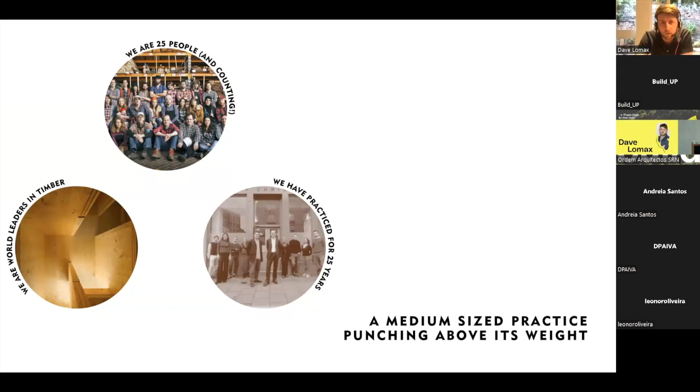And we think that we are world leaders in designing in timber. We think that we punch above our weight in terms of the size of our practice and our reach and what we do around the world. And first and foremost, we like to make sure people remember that we're not just wood people, we're architects. It's really important to us that the architecture comes first, that really, really high quality buildings are the things that

we aspire to do. But the way that we do that is to do that in the lowest carbon way that we possibly can. And in order to do that, we generate new knowledge. So about 20% of our practice's work is in primary research directed at sharing that knowledge and sending it around the world to help others to do the things that we as a small practice in East London can't do.

We do that internationally. We currently have live projects on each coast of the US, one in Italy, one in the Netherlands, even one in Portugal at the moment in a very early stage. But we also do the sharing of our knowledge and the research base and all those other things internationally as well from our base in East London.

So why do we do it? Why is wood important to our practice? Well, this graph here shows where all of the environmental greenhouse gases come from every year. This is a slightly out-of-date graph, I think maybe 2018 from the World Resources Institute. But if you look at the figures for iron, steel, and cement and add those together, you'll notice that those figures are pretty much the same as the energy in use from all residential buildings in the world, about 11%

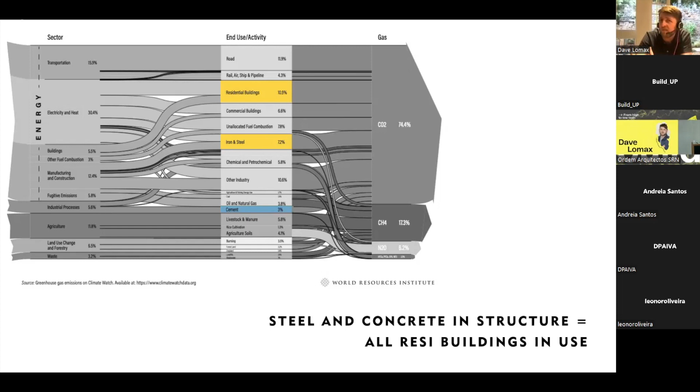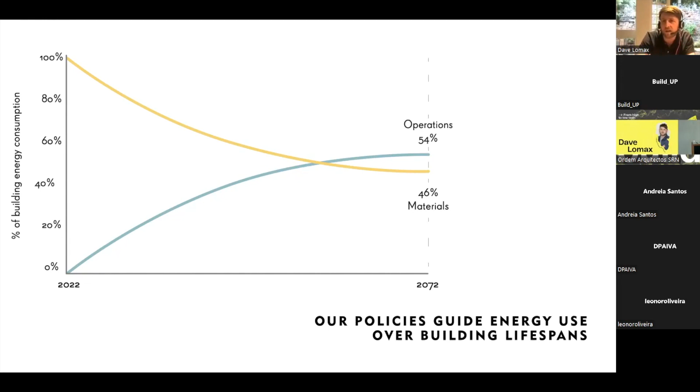And that's really important to us because when you think about the emissions from a building, on this graph, what you can see is that on day one, if we call it 2022, all of the emissions that have been caused by that building come from its construction, 100% in materials on day one. Now, after, say, 50 years, that balance shifts. Of course, we sleep in our buildings, we turn the lights on, we turn the TV on, we do all those sorts of things. Gradually, the proportion allocated to operation creeps up. And after 50 years, yes, most of the energy comes from operations.

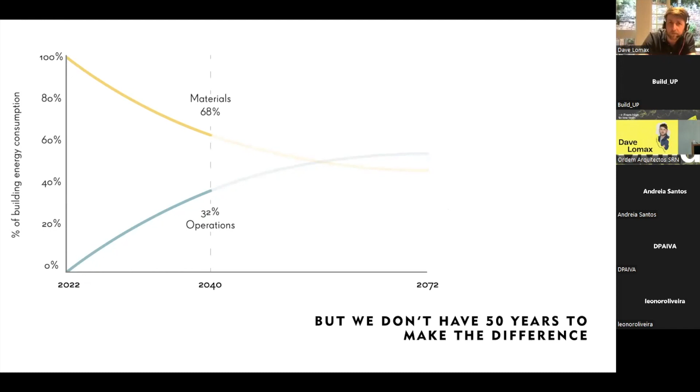But I think that none of us are talking about having 50 years to change the situation that we're in. We haven't made commitments for the next 50 years in terms of reducing our carbon output. We've made commitments on much, much shorter timescales. And if we take arbitrarily an 18-year lifespan, probably far too long in the first place anyway, in terms of reducing our use, at that point, we're still talking about 70% of the emissions from a new building built today being from the materials we use to build it. And currently, we're doing very, very little to change that.

Now, for us, we think it's really important that building professionals, architects, building procurers, people who buy buildings, building contractors, have a responsibility to own this, because the impact we can make on changing that metric, on changing that emission of carbon, is vastly bigger than an individual.

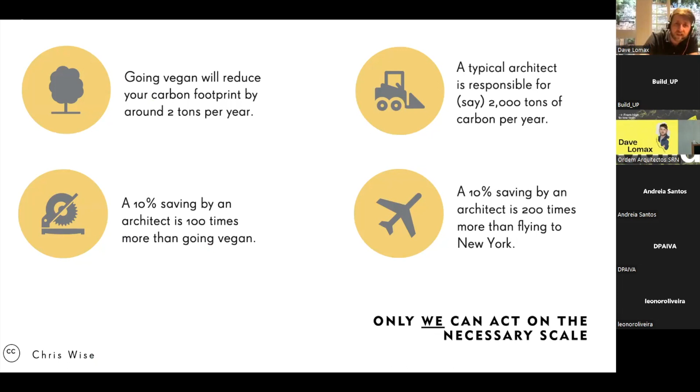An individual making a choice to no longer eat meat will make one kind of impact, but we can multiply that impact by 10 times, 100 times, even by making very, very small changes in the way that we practice. Not even necessarily on every single building that we design, but we have to try and we have to multiply our impact that way. And so for us, the crux of this is the opportunity that we have from timber.

So by using timber, we can take out iron, steel, and cement that you saw as being massive contributors to greenhouse gases and global warming, and we can replace them with a material that is much lower in embodied carbon. It takes much less carbon to produce. But more importantly than that, this is a material that takes carbon out of the atmosphere during its lifespan, and we have the opportunity then to put it into a building where that carbon can be locked away for 50, 60, even 100 years.

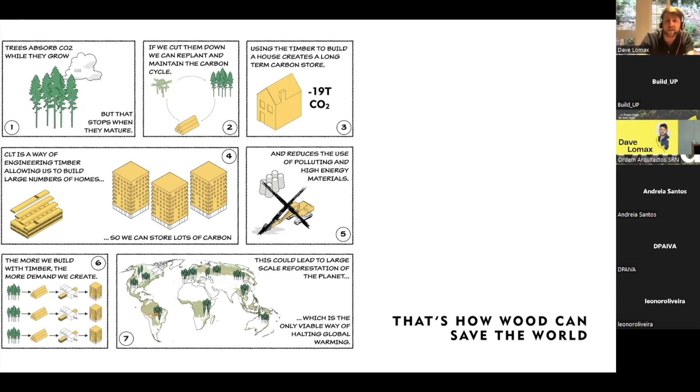Even better if you look at the context of the Canadian wildfires that we're seeing at the moment, where if we leave them in the trees, they're susceptible to going back into the atmosphere. But if we lock all of that carbon into our cities and create a massive carbon sink in those cities, we can store that carbon safely, manage it, grow more trees, take more carbon out. So to us, what's really interesting is the idea that this is the only technology that isn't only talking about slowing down our impact on the planet, but in fact hoping to try and do things that might slowly reverse it.

I said that there's very little policy about this. I mean, when I started giving this talk, there was almost none. But I think the other reason why wood is because actually quite a lot of the world has realized that this is the thing that we need to do.

Some of you will know lots and lots about mass timber already. You may well have just heard quite a lot. Sadly, my Portuguese isn't up to understanding what's been said already.

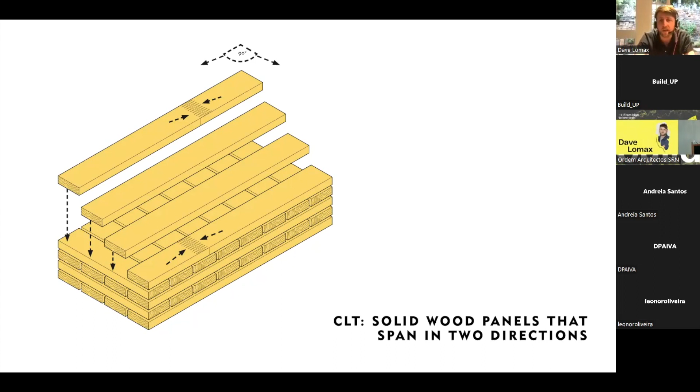But a quick guide is, many of you will have heard this acronym CLT. So cross-laminated timber. That is one kind of mass timber. I think what's important to say is that it's solid wood all the way through. That product consists of 3 to 7 layers of softwood normally bonded together, but the important part is that each layer is turned through 90 degrees in order to give spanning properties that work a little bit like a concrete slab with reinforcement. It spans in more than one axis. So it's enhanced in its performance from a single piece of wood that in its natural state only spans in one axis.

What's great about this material is that it's accurate. It's made in factories, it's made in safe environments, it's predictable, but also it does what it says it will do. So we know that the performance of a CLT panel is very, very likely to be incredibly close to what we predict it to be, unlike materials like concrete, for example, that are poured on site in the wind, in the rain, in varying conditions, and we never quite know what performance we're going to achieve.

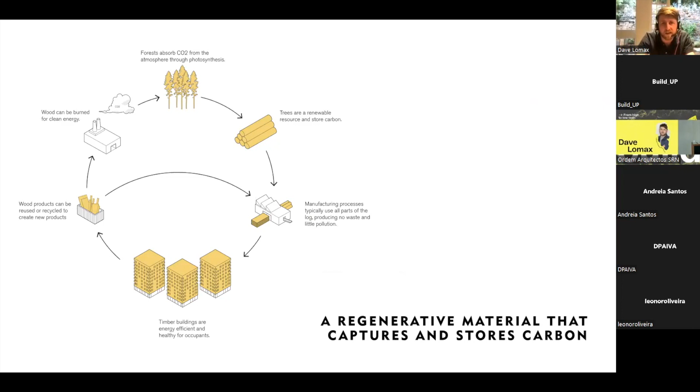Again, what we have is that opportunity to lock away carbon, but we also have that opportunity to create a cycle, to be really circular in the way that we use our materials and put that back into the atmosphere and back into the environment that we use to create it.

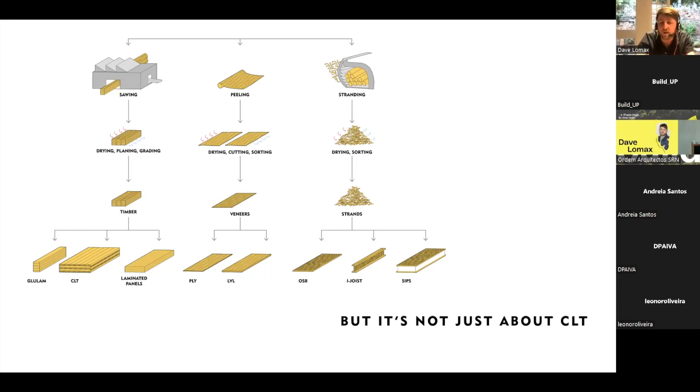What's really important is CLT is kind of the famous buzzword of the moment, the thing that everybody's excited in talking about. But actually for us, it's really not just about CLT. It's about really carefully understanding the whole ecosystem of these timber products that we can use to start to capture that carbon from the atmosphere and put it into our cities. And actually, there's real nuance in choosing these different materials, which we'll show you through some of the case studies that I'll put up on the screen in a moment.

But to us, what's become really important is the idea of thinking of mass timber not as an individual product that you substitute in for concrete and swap the gray stuff for the yellow stuff and everything will be fine. Actually, there's a lot more to understanding how to build in timber. And that has been a real focus of our research over the last few years.

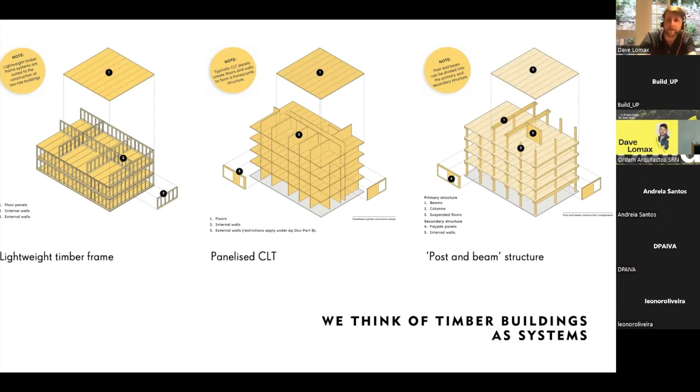And key to that is understanding the idea of timber and mass timber as a system, as a combination of elements that need to work in harmony together. We simply cannot design concrete and steel buildings and substitute out one material for another and expect to get really good outcomes in terms of carbon and indeed cost. So for us, the first step was to begin to try and construct some of these buildings, learn by doing.

And when we built Murray Grove, that was not our very first timber building, but certainly the largest. At the time, it was the world's largest. It was 9 stories tall. It was built incredibly quickly, incredibly quietly, in a clean and safe way. But at the time, no other building in the world in mass timber had been built at above 4 or maybe 5 stories. So to us, it's an incredible learning experience.

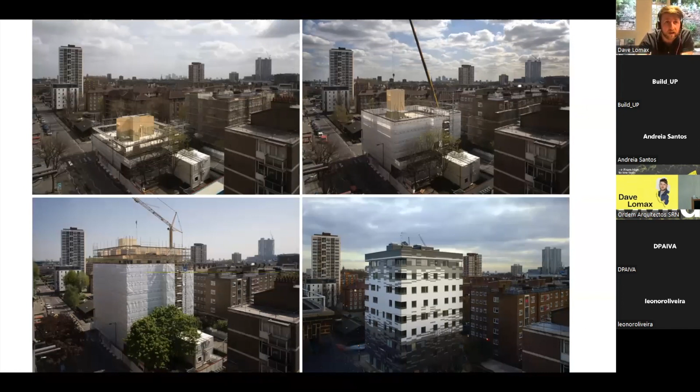It showed us what the barriers might be to constructing a mass timber building at this height, showed us how to try and overcome those. It showed us how to have conversations with clients to explain to them why they might choose to work in this way. But the most interesting learnings for us were around the idea of walking onto this site, smelling the wood, seeing how low technology actually it could be to assemble this with an incredibly small team of people, and being on what seemed a much cleaner, safer, nicer building site than all the ones we'd been on before.

And even the neighbors found the same, no cement trucks driving up and down the road, no jackhammers, electricians that could staple installations onto the ceiling rather than loading jackhammers onto their shoulders and hurting themselves by drilling holes to fix small screws into concrete soffits.

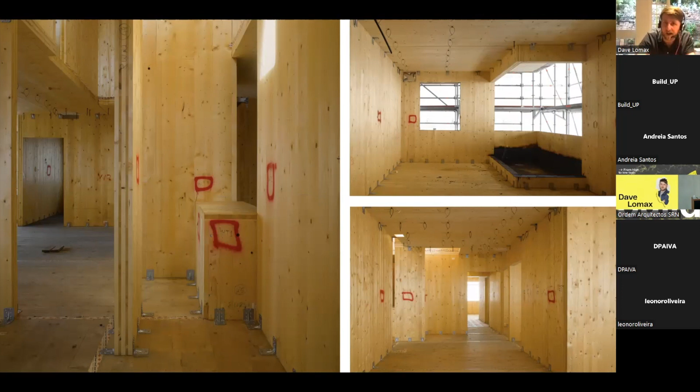It also taught us what the design parameters for mass timber buildings were. Here, of course, as you can see from this image, we're building in panels, so panelized CLT as a system entirely on its own. And so we had to learn what the logic of designing a panelized building was compared to the logic we'd always been brought up with, which was to design column and slab arrangement buildings.

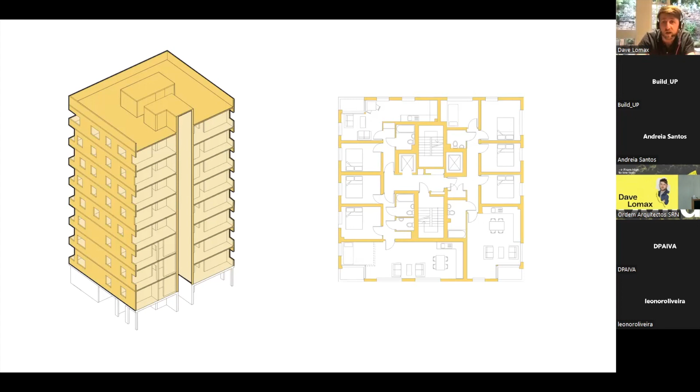Interestingly, because of the learning process we were on, we reckon there's about 25% more wood per square meter in this building than our modern mass timber buildings that we're building 15 years later. And that, I guess, shows the distance of the journey that we've had to go on over the years. But maybe an interesting example of how we jumped forward in that process is to show you Dalston Works.

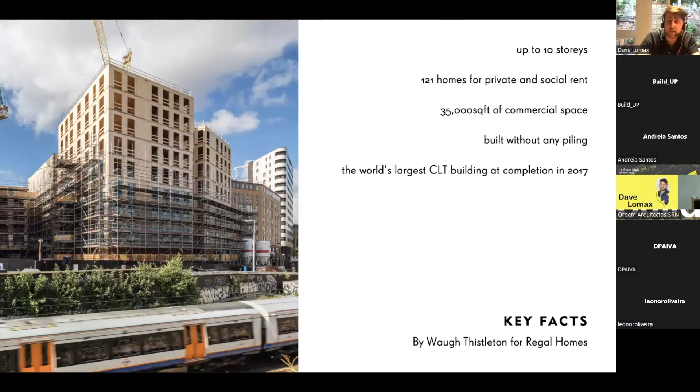So not actually much taller than Murray Grove, but I think for us, this was about proving the idea that we could do much more significant buildings. We could do them for developers that weren't in themselves especially interested in sustainability, but we could prove that this could be a normal way of building buildings.

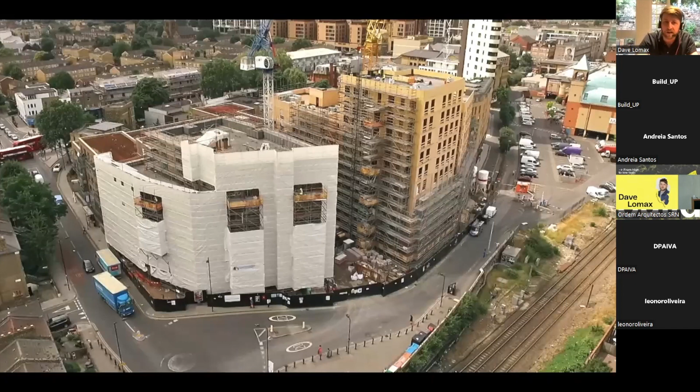Here you can get a sense of the difference in scale that we're talking about. So if I flick back, Murray Grove would have been this one core of the building. Here we have a building of 7 cores just 10 years later, built again, not for clients that are looking for a unique one-off building to prove how sustainable they are, but trying to make the difference with clients who maybe don't have this as their primary agenda, because that's where we can make the biggest difference.

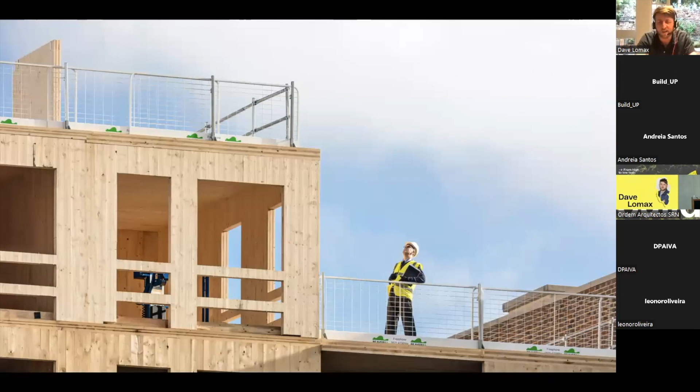But still, for this much bigger building, you can see the same simple connections, the same CLT panels, the same site managers wondering when the crane is going to land and drop the next panel into place. But here we started to learn how to have conversations with developers who aren't interested in sustainability and carbon, don't understand why they should do better when, of course, there were no rules around embodied carbon, as I said at the beginning. Now here we had train lines underneath. You can see the dotted lines that sort of constrain the site from building heavy buildings.

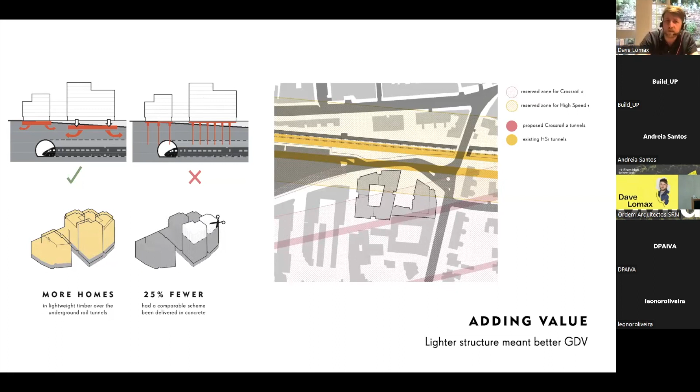We were able to talk to the contractor more about: we can build your building 20% faster, so if you've borrowed money, you can make more money. We can build 25% more homes because we can build the whole building on a 90 centimeter thick slab with no piles, which we couldn't do with a heavier concrete building. So we were learning to talk the language of our clients rather than the language of sustainability to ensure that these messages could get across.

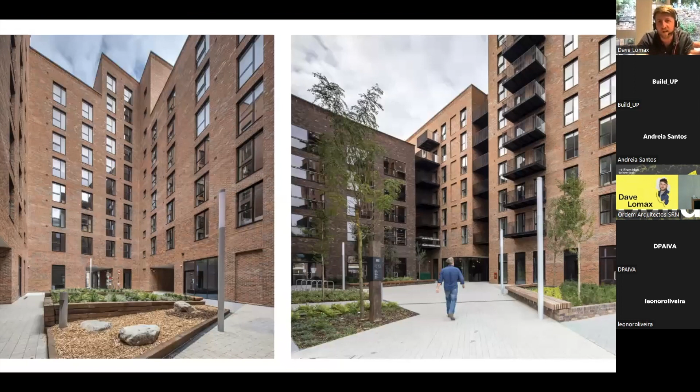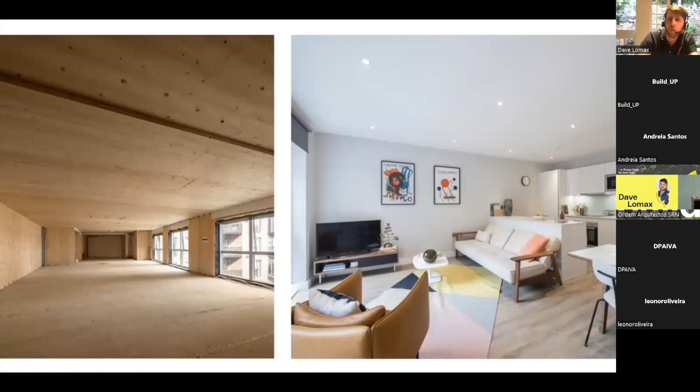And of course, for these sorts of clients, what's really important to them is that it looks just the same as all their other buildings. And so that's what we proved. A building clad in brick, maybe not the brightest idea to put heavy materials on lightweight buildings, but we were able to prove to them, hey, you can have more money, quicker building, less borrowing, and ultimately the same product that you sell every day. So why wouldn't you do this? Why wouldn't you save carbon and build in this way?

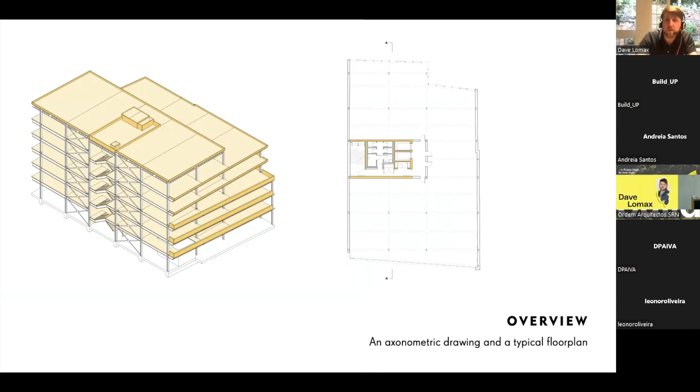Now, part of that journey was learning to build in other materials and learning to build in other sectors. 6 Orsman Road was our first really significant office building. This allowed us to investigate lots of other themes: the idea of passive shading of the building, bigger ideas of how buildings can be sustainable, using lightweight cladding materials to show that we can have a back-to-back process with factory-made cladding to go onto factory-made structure, and also looking at hybridizing the building in certain situations, using a combination of steel and timber to do as much as we can in every individual building. If we can't build the whole structure out of wood, maybe we can use some wood, reduce the embodied carbon, but compromise in certain places.

And this building also was the start of our journey in thinking about demountability. So every single connection here is a bolted or a screwed connection. There are no welded connections. We know that we can take this building apart if a component fails, if we need to change its performance, and we can keep that carbon in the CLT for much longer if we know that later we can take it apart and use it in another place, or repair it, replace it, extend the life of the building.

Now, as we started to deliver and build real buildings, it was important to us to work out how we can collaborate, share, put that knowledge wider into the world. The first document that did this was the CLT 100 UK book. We actually produced this as a study for the Binational Softwood Lumber Council, which is a collaboration between US and Canadian State Departments. And this was a study of 100 projects that already existed in mass timber in the UK, aiming to show to people that this is not brand new. There is data, there is learning from all these projects.

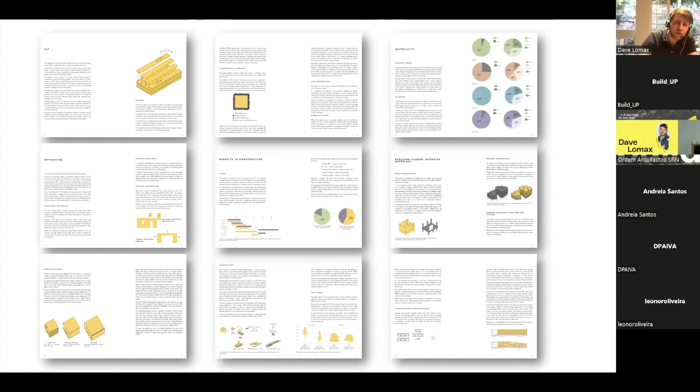And this was used by the Binational Softwood Lumber Council to start to lobby for and talk about the idea of building code change in the US. And I'm happy to say that in a few states, they now have been able to secure that. But this was the first attempt at gathering together what we know and sharing that as a how-to guide and as an evidence base. Moving on from that, we've been doing work in the UK housing sector.

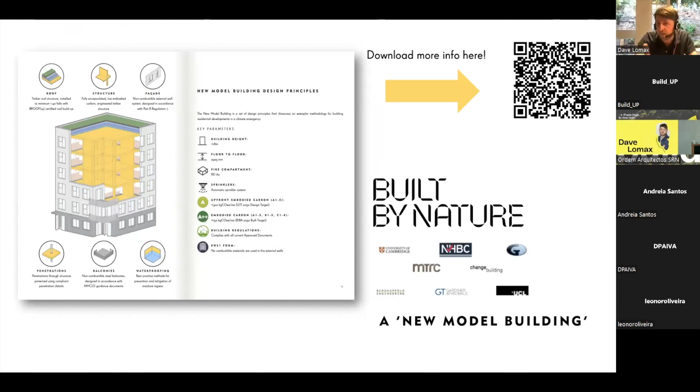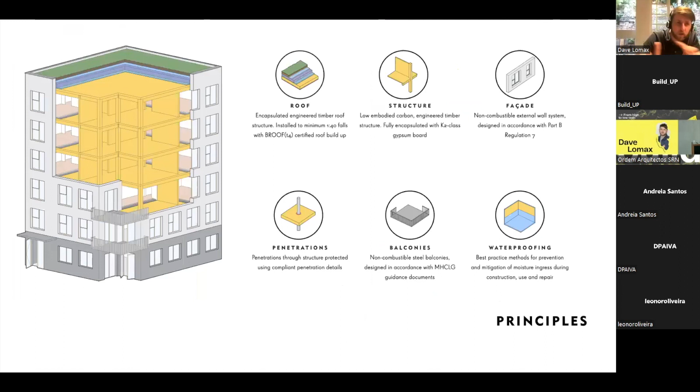You may know that there have been some challenges in delivering housing following on from the Grenfell fire in the UK. What we wanted to do was prove to people that none of those changes meant that you cannot build residential buildings in timber. So we gathered some funding, we gathered some partners, a really exciting team of people, to put together a document that proves that you can build this. It consists of a series of individual principles, a performance specification, details, and here you can see us starting to investigate that idea that even though each building could individually be different geometries, different shapes, we start to talk about delivering mass timber as a system.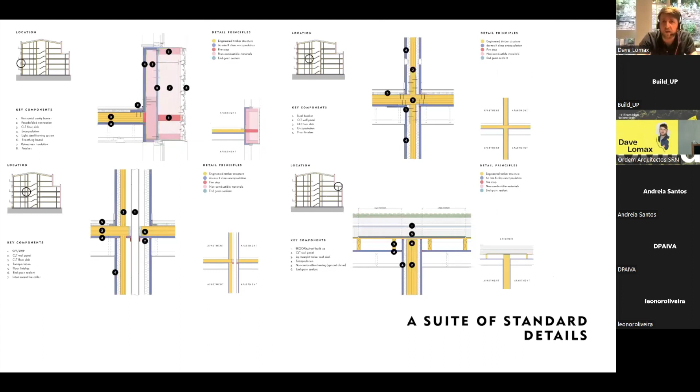If you apply the principles of this specification, if you apply them in the way that we have developed these color-coded, performance-based details, and if you build them in the sequence that makes sense and is approved by other parties, you can deliver in mass timber without taking on this personal risk and liability of learning each time as a bespoke product how to deliver within the building codes that you're working with.

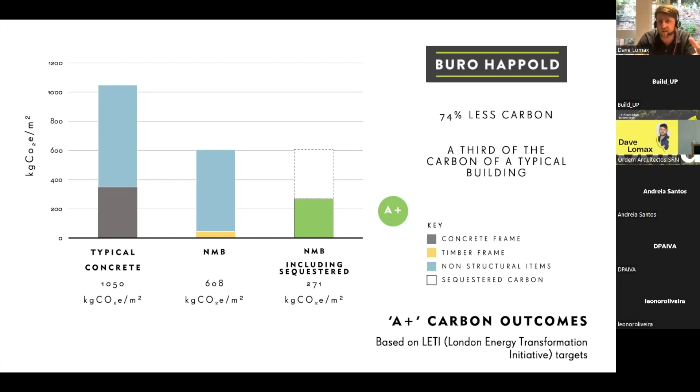What we're also able to do in the new model building process was to quantify what the benefits of that are. So here you can see that if we compare a typical building we designed using these details with a concrete building of the same scale and the same arrangement, we're looking at 74% potential reduction in the embodied carbon of that building. So if you go back to my earlier graph of saying, on day one, 100% of our carbon emissions are from embodied carbon, well, now we can reduce that by 74% for a timber residential building between 3 and 6 stories in the UK using this systematized approach to building.

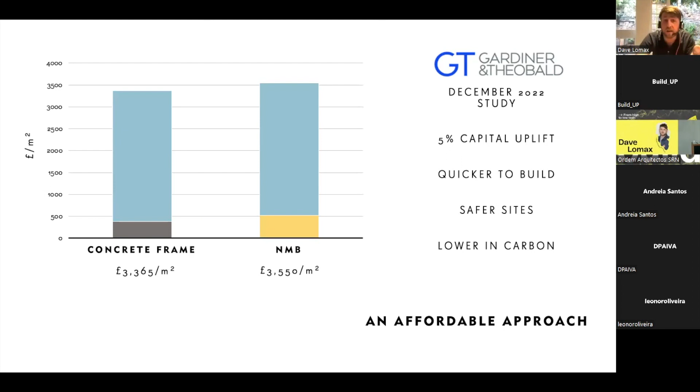And of course, from all our learnings of building buildings before, we know that clients who don't have to do this want to know what's in it for them. So we're able to quantify that in terms of costs. It's a 5% capital uplift. We're thinking that there are going to be carbon taxes of maybe 120 euros per ton in the next few years. The moment you compare that 74% reduction in carbon with that 5% difference in capital cost, you can see that as soon as people start to look ahead to all those policies emerging across the world, when those policies start to turn into money, that 5% is going to be a saving, not an extra cost. So we're able, through research, publication and collaboration, to start to prove the logic of the things that we knew intuitively and demonstrate the things that we've studied through doing.

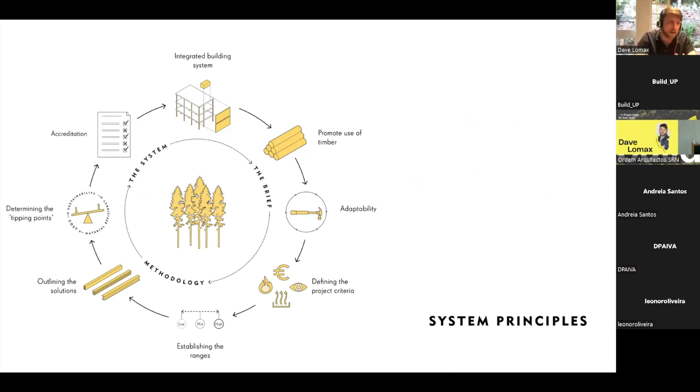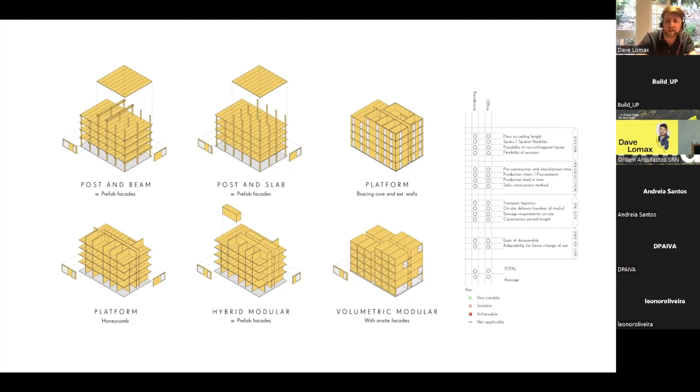Finally, in our research bit, we're also able to share that across the EU. We're just coming toward the end of a 4-year funded research program with the European Commission, part of the Horizon 2020 fund. The idea is to take those ideas of systematization, expand them across a massive set of available mass timber systems, LVLs, glulams, CLT, and apply that same idea of layers of information and categorization of components into a system, so that we can create a how-to guide, expressed as a free website, which explains to anybody in any territory in the EU how you will meet your local building codes under the headings of vibration, fire, acoustics, whatever it may be, by applying other layers in a systematized way, because we have that evidence.

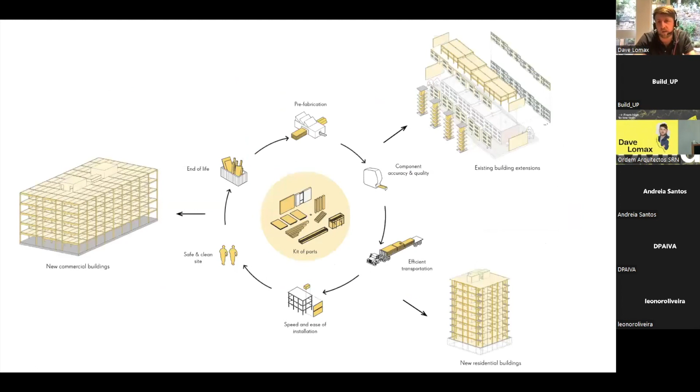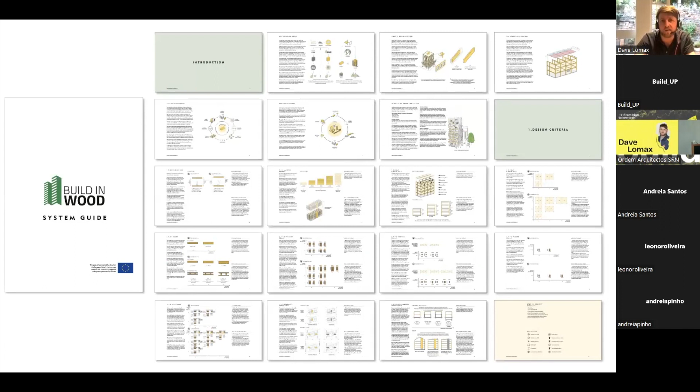We're currently building a demonstrator building, a prototype building with the Danish Technical Institute in Copenhagen, and that will come along with new test data that proves the way that we're doing things. And it overlays other things we're excited about. Even in this process, we've identified new demountable timber-to-timber connections developed by Rothoblaas based on the outcomes from this research. And that will be published as a very big book. So I'd encourage you, when the time comes, to look at the website and Configurator as an easier way in. But really, this is about us multiplying our reach as a small practice with a particular passion, to share that with the rest of the world, to make the size of impact that we need.

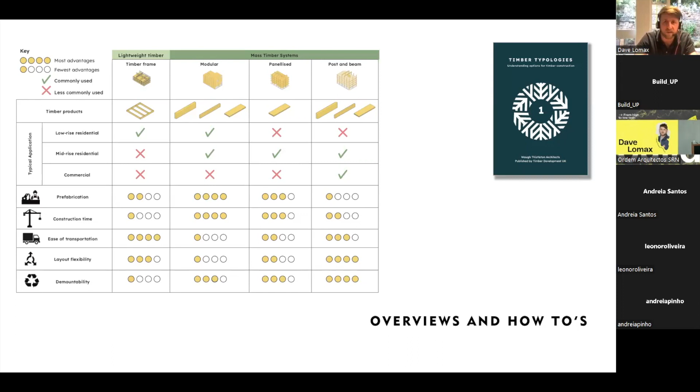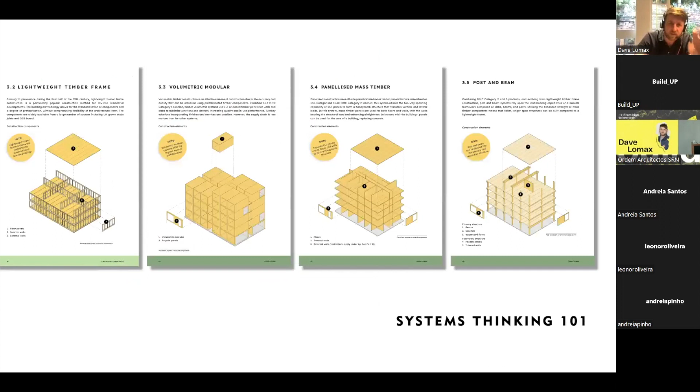Maybe this should be the first document, but it's our most recent, so it comes at the end. This is wheeling right back to the beginning of the conversation, a document you can download right now, volume 1, which tells you from very first principles what we mean when we talk about mass timber. It's a great document for sharing with teams in your office who might never have come across this before, talking about the individual components, the different ways we can make components out of timber, what that means in terms of systematization, and giving you rules of thumb. How big can it be? How far does it span?

Why would I choose glulam versus panels versus timber frame? Now, having done that, we've been on this big loop of learning by doing. We've tried to codify that, share that, enhance that with testing and primary research and data that we can learn from partners from across Europe and indeed across the world. The next thing is to start to go back and apply that back into our work.

So on a very small scale, we were able to look at those ideas of volumetric and modular design, ideas of demountability, with this pavilion that we provided for the American Hardwood Export Council. We were also able to investigate new species here. So this is tulip wood, which is in oversupply in the US, and AHEC, the American Hardwood Export Council, they commission a pavilion in this every couple of years to promote that material for use over here in Europe, so it stops being used for fuel and going back into the atmosphere.

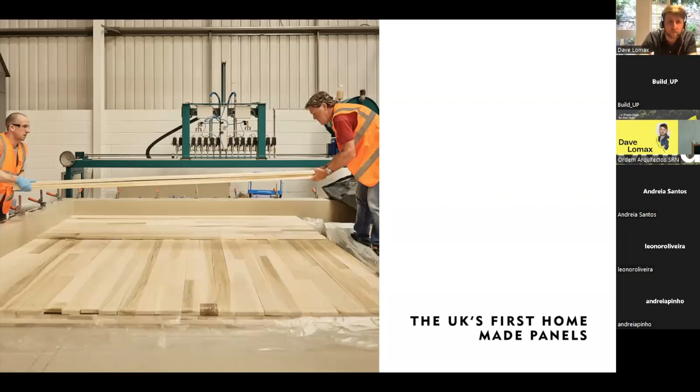And we said, well, hold on, why are you making a pavilion every year and then throwing it in the chipper? That's the opposite of what you're trying to achieve here. We said, why can't we make this at home in the UK, the first ever CLT panels pressed here, albeit with American lumber. And then let's make it into something that we can take apart again and reconfigure and show to other people. So what we did was exactly that.

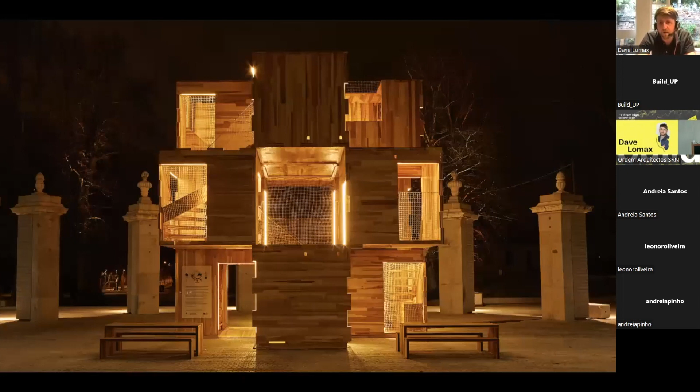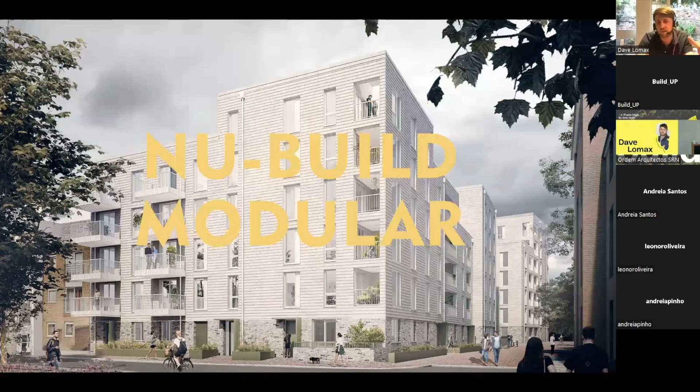So again, we're testing these ideas that we've had in research and in buildings, prototyping them on a small scale, then implementing them in bigger scales. So we were able to start to think about how these demountable, modular and reconfigurable designs might work for housing. So here, this was a project where we used our newfound skills in codifying and sharing to design a system that underpinned a whole new factory built by a housing provider in the UK.

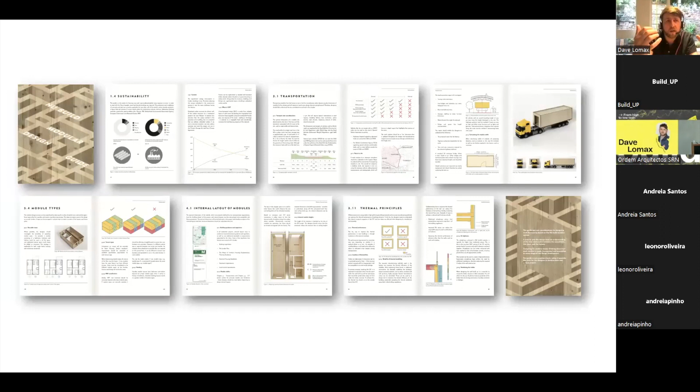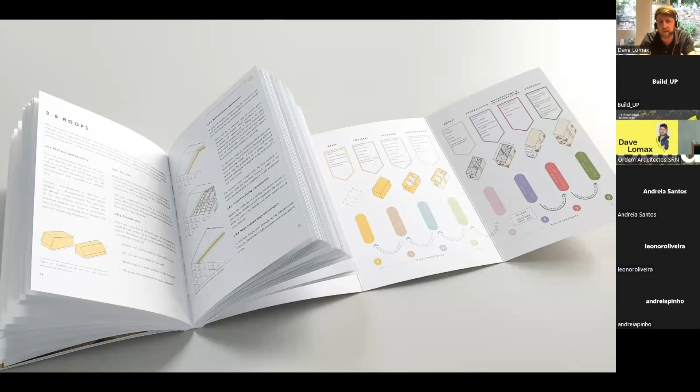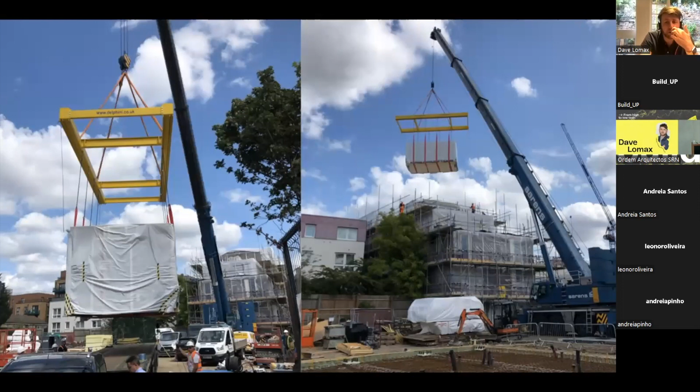They wanted us to work through and understand by doing what their system ought to be, and then codify it, turn it into documents and share it so that other architects could work with their factory to design their next building. And of course, none of that's any good unless you actually do it. So here are the first modules being constructed in the factory. Here they are leaving for site, and here they are being erected into the building that you saw at the beginning of this little section of slides.

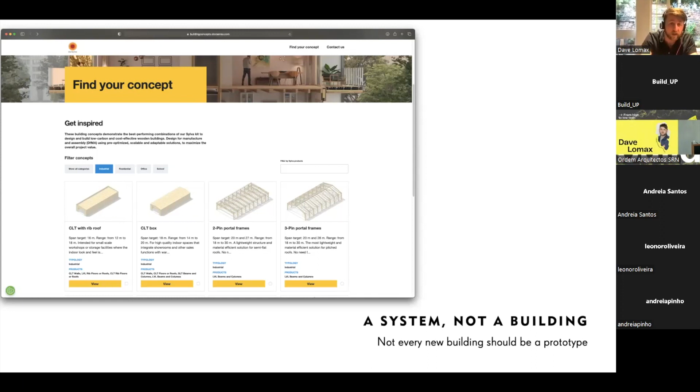We're expanding that into other sectors. We're taking that same systemization approach and idea into industrial buildings. This is a system you can buy today from Stora Enso's website. They very kindly invited us to help them codify the different decisions you might make when procuring industrial buildings. It's another sector where we can and should be reducing our carbon impact and using timber. The whole thing is there like a configurator.

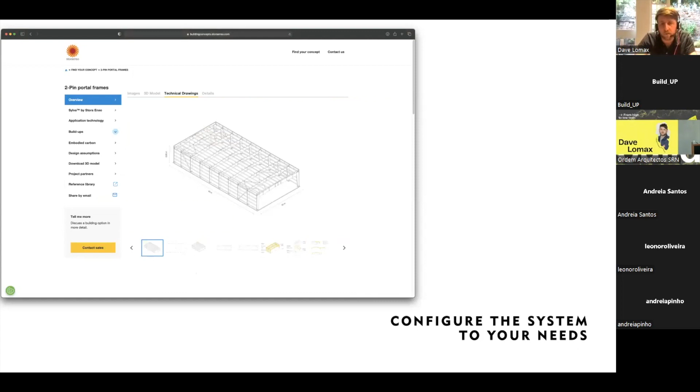So if you were to buy a car tomorrow and go online and you wanted to know how much it cost you for that leather seat or for that air conditioning or for a CD player, if you've still got a pile of CDs lying around somewhere, I don't know. This is exactly the same process. So you go online, you choose the parameters for your project, the size, you can download details, you can download 3D models. That will give you a volume of timber, which can quickly get you a cost from Stora, and you're able to go and buy it today and go and build it.

That principle is based on this idea of pixelization, I guess. So what is the right resolution of standardization? We think that standardization shouldn't be whole buildings. You shouldn't go and buy a whole building off the shelf. You should have choices, but we need to know at what level we standardize.

So if we take examples from the car industry, it's not about using robots. It's not about using pulse line manufacture. It's about understanding what should be standard and what should not, because car factories don't make things. They buy things and they assemble them. And a really great example here is the Mitsubishi platform, which is wheels, chassis, engine.

That Mitsubishi platform creates vehicles that are as different as the Lancer, a kind of sports vehicle, versus the Jeep Patriot, a completely different vehicle. They have the same component at the middle. So it's about working out what scale should we be componentizing, what scale should we be standardizing, and actually from a standardized system, you can get all of these different variations. And we've learned that through really understanding the different materials, processes, products that are available in the timber industry, understanding the supply chain, and understanding how they all work together as a systematized approach.

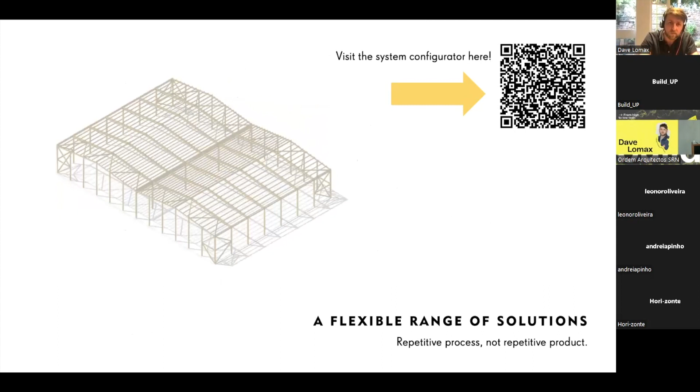And of course, they don't have to be ugly. So a few images here to explain exactly what the environment might be like in some of these buildings and what they might be used for.

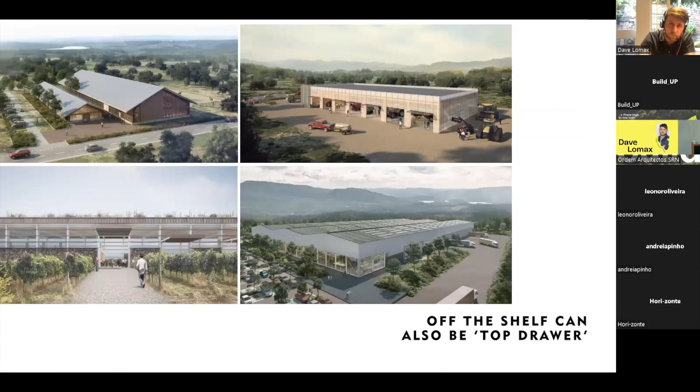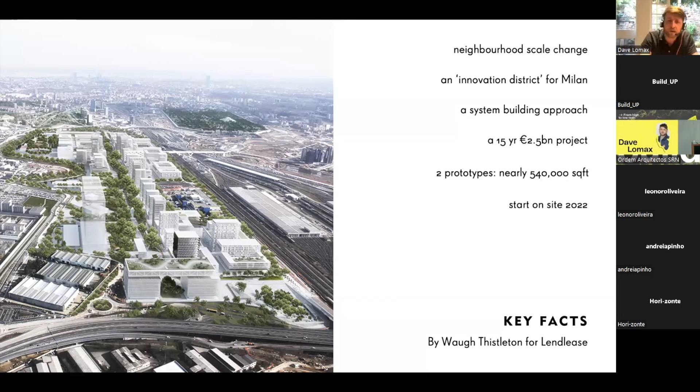So at a different scale, we applied this to a project for Lendlease in the north of Milan at the old Expo site. The principle here was that Lendlease said, well, we like this idea of systems, but we're going to have to build hospitals, schools, offices, homes. How can we develop a €2.5 billion master plan over 15 years using a systematized approach? And we said, well, what we need to do, again, is work out what's the right size of thing to standardize. And what we established for them was that a working prototype would be this 9 by 9 meter grid, which we knew could give the flexibility to deliver all the things they wanted.

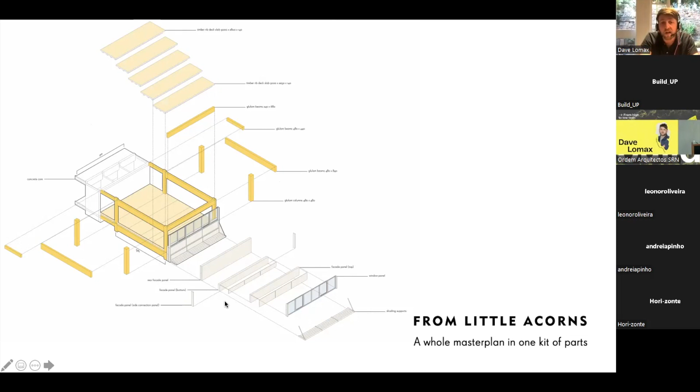Each of these components could be called off from the factory exactly the same every time and have the flexibility to deliver the things they want. And it could be backed up, just like a car factory buys steering wheels from different places, buys leather seats from different places to assemble them into one. It could be backed up by a kind of hinterland of other products that can be standardized to meet it.

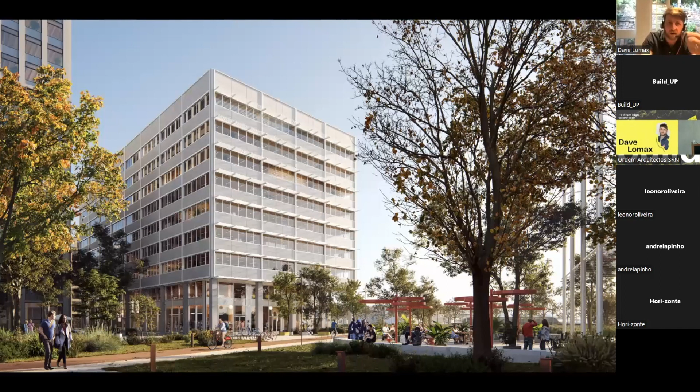And if we multiply that by a number of floors and layer that up with different products, you can see how we can create buildings and how that can be multiplied into whole campuses of different proposals, each entirely suited to its own function, but based on that standard 9x9 grid that is the beginning of it all. And of course, again, to our mind, we think we're able to create beautiful buildings, great spaces that are environmentally responsive and do all the things that they need to do. But all of it from this first prototype, which is available to go and see right now at the Perceptions of Timber exhibition in Milan.

So this is the squishy bit of the presentation. I've gone pretty quickly. We're at 22. I'll try and get through this section quite quickly because it'd be great to have questions from you. But maybe I'll flick very quickly through the last couple if we're running out of time slightly.

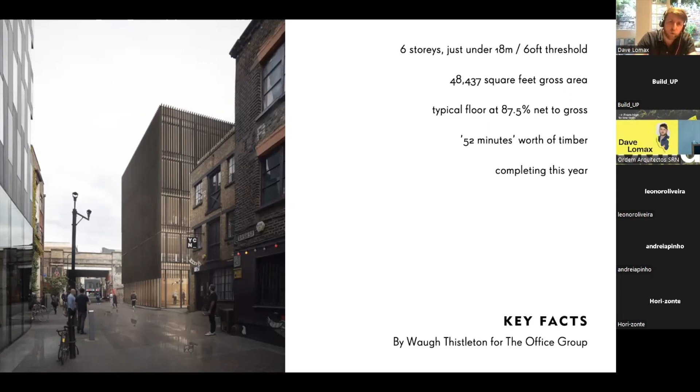This is about the buildings that we are recently completing, that we're working on into the future, that maybe test even more exciting to us, at least, and novel ideas. The black and white building is one that we completed earlier this year in London. It's been very popular. We've shown over 600 visits around this building during the course of its construction and after its completion. And it's interesting to us because it's a building where the client was really engaged in designing the building with us and also really wanted to tell the story of sustainability. So unlike a lot of the buildings we've built, there is lots and lots of exposed timber. It's really easy to tell the story.

And we can start to build real evidence for these ideas that we've been having and tell them through data, tell them through experience. So for example, we have a building here where the basement, a single story of accommodation, took 38 weeks to build, but 6 floors of accommodation above that took only 14 weeks. That was erected with between 4 and 6 people on site at any one time, a tiny number of people. The neighbors were worried about noise. Their noise monitor went off once during the 18 months of construction. The reason it went off was because they had their own party. This is quiet, quick, neighborly construction. This is also a building that really leverages 15 years of knowledge in different structural systems.

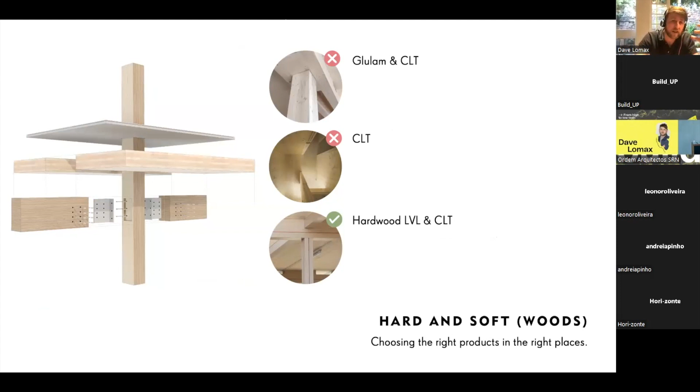We were able to identify the use of LVL, which is a very under-recognized, very rarely used material in the mass timber space, which gave us an amazing economy of material and allowed us to get the big open spans that we needed, but with the absolute minimum of material and therefore the minimum of cost. But also we started to think about the architecture in the way of what is this architecture of sufficiency? What's the minimum we can use?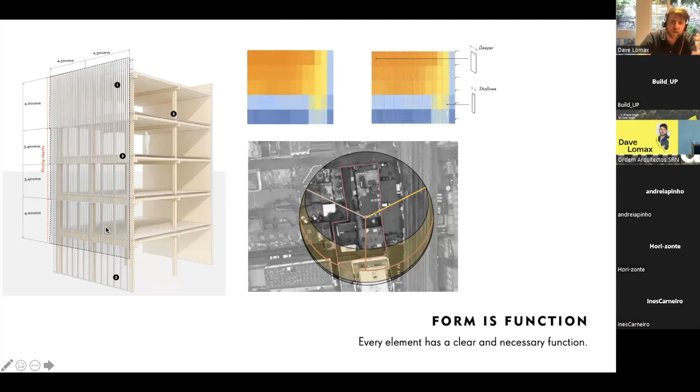So we started to use the computer and parametric tools that we started to learn through standardization and factory manufacture and apply them to designing a responsive facade. So we applied some path data and the shadowing of nearby buildings to the facade to create a heat map, which allowed us to choose the absolute minimum amount of timber to clad the building in. You can see it's more opaque at the top where there's more sun, less opaque at the bottom. So always layering these ideas across, but ultimately resulting in the same process.

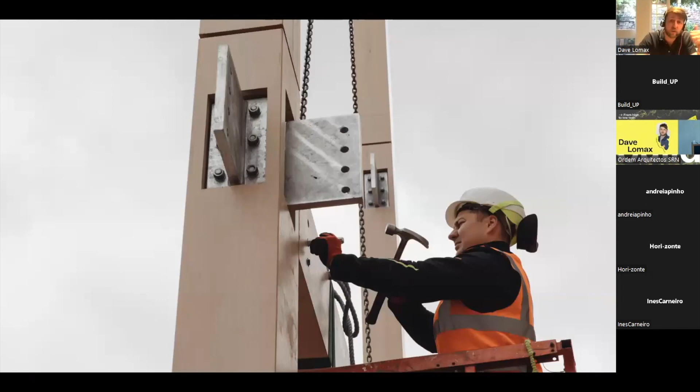Really simple, quick manufacture with small teams, simple connections with bolts that can be taken apart again in the future simply by drilling out the little plugs that form the fire protection over the top of them. And here you can see, when I talk about using 25% less timber on our buildings now, the absolutely tiny amount of wood that is going into making these big open spaces through our really detailed knowledge of how to choose and combine these materials now.

This building was just over 1,700 trees, but the amount of wood in that building, if you think of those trees growing over the course of a whole forest rather than an individual tree growing over 30 years, there's about 52 minutes of wood in that building. So we really can be doing more and more of this without damaging the capacity of our forests. But really important is to start to prove the numbers behind what we say we're doing.

So the pie chart on the right is the equivalent building had we designed it in concrete. That would be about 662 kilograms of CO2 equivalent per meter squared across the building on the day that we open. So we've saved about 1/3 of that carbon by building in wood. We can definitely do better. 37% of that comes from that concrete basement. So there's definitely things we can improve.

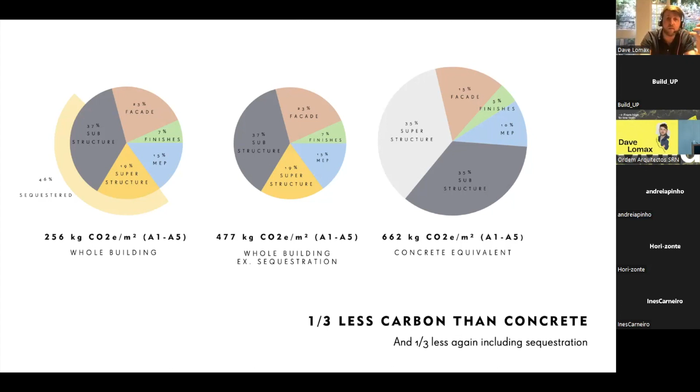But if we then also include the carbon that's stored inside that building, we get a much, much smaller number, 256 kilograms of CO2e per meter squared. So we really think we can make a massive difference compared to building in concrete, even with concrete basements and things that we need for other reasons. Here again, you can see that breakdown, the concrete and the mechanical installation being the biggest parts of that.

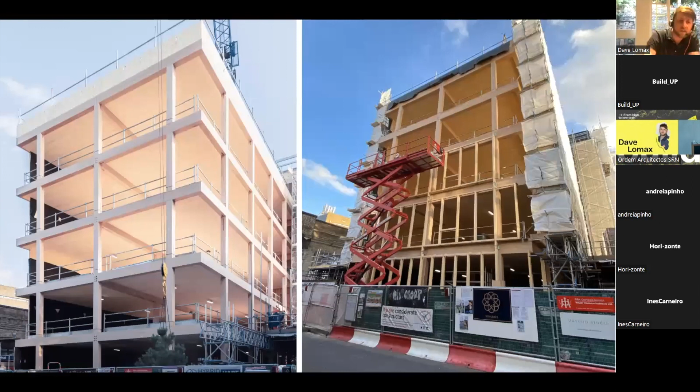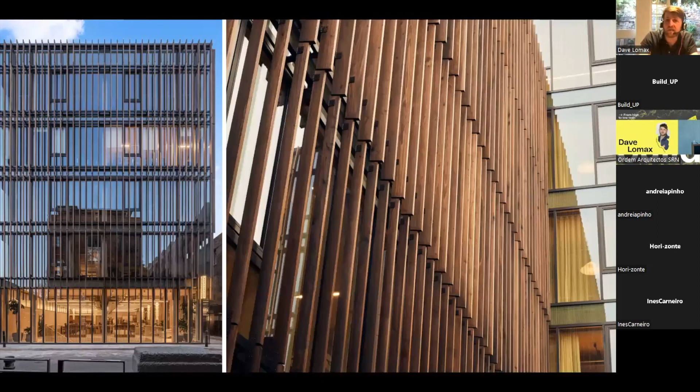So here's some images to flick through really quickly. This is what it looked like during construction. Here's an image to prove we did what we said we would do. So the CGI from design development is on the right and the finished building on the left. And here is the facade with those changing stepping louvers that respond to the daylight conditions in different places.

And again, the eagle-eyed amongst you will notice that this is tulip wood. This is what we were using on that pavilion, trying to prove that it can be used for buildings, that carbon can be locked away. So this is the world's largest heat-treated tulip wood facade, proving that we can deliver that material into building projects and keep the carbon within it for the longest possible amount of time.

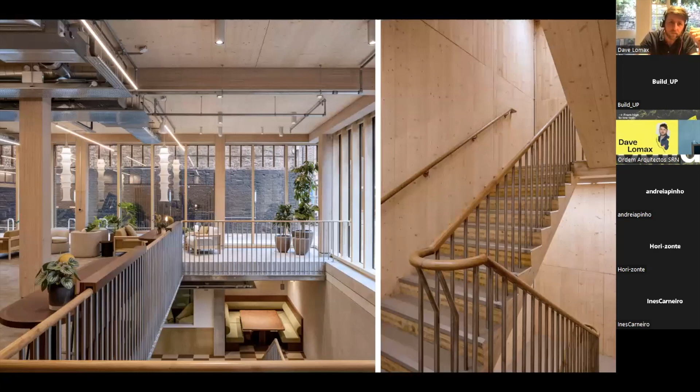Another building we're really proud of in that space using similar technologies is Vitsœ. This is a manufacturing facility for furniture, for shelves. Their question to us was, we produce a really high quality, quite expensive shelving system. We tell people to buy a little bit now and change it as their life goes on. It's a system. Why don't people understand? Why can't we have buildings that work as systems where you can buy a little bit now, you spend a little more because you know you can change it and adapt it as you grow older? Well, actually, we said, yes, that's exactly what we're interested in too.

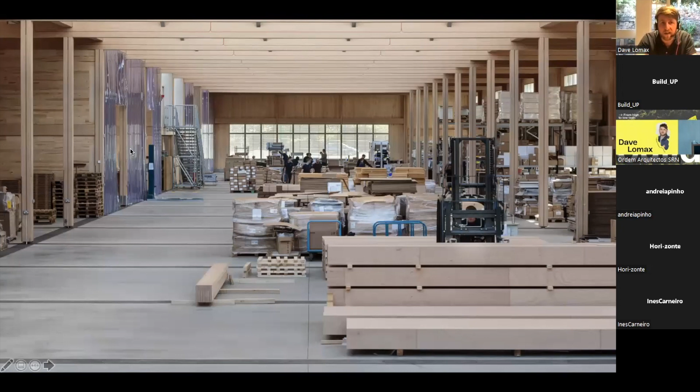So we took these ideas of systemization. We developed their building on a long linear site as a series of, I think, 17 bays on day one. And we told them how they can go and extend the building in the future by extending in linear fashion. Here you can see the building on the site and the space at each end to maybe extend that building in the future. But we also thought about extending in the short term. So here, hopefully you can see my pointer in the distance. There's a little beam between the columns, which supports a floor above and a staircase.

Here you can see there is no beam. But here on the floor of the warehouse are beams ready to slot in if they want to extend their factory inside in the future. And of course, being a factory, they have things like forklift trucks. So they can ably change the environment in their factory from day to day pretty much, but still have a really beautiful, welcoming, humane environment for their employees to work in.

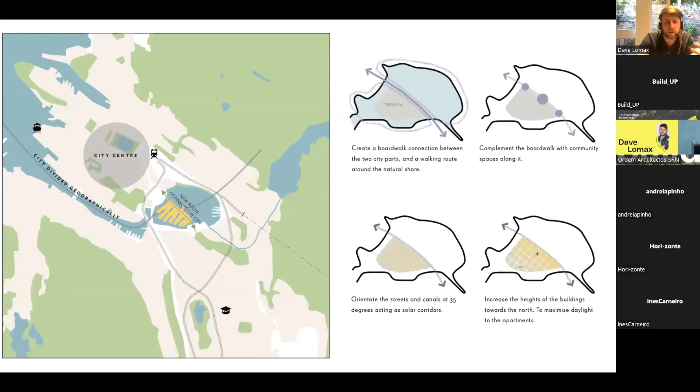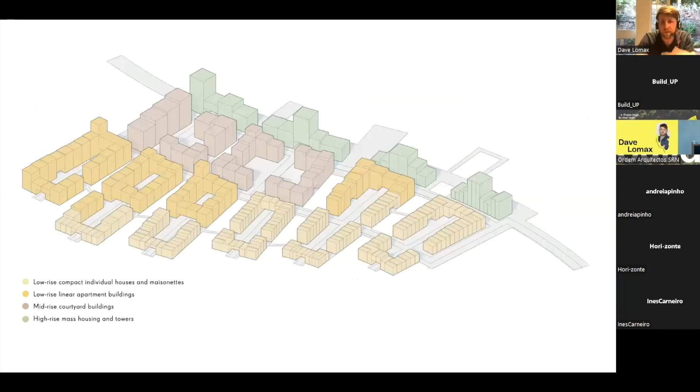But this is where we started to think about how do we employ those ideas and think about town planning that is sustainable, that gives best access to daylight, that allows breezes to cool our buildings rather than sun to simply heat them up. And thinking about how we organize at a city scale to be sustainable, always building with wood, always thinking about the same materials, but overlaying other bigger scale ideas.

Similarly, we started to look at how we can retrofit structures. So this is a tower in London. We took this to detailed design. Unfortunately, for lots of reasons, COVID being one of them, it didn't happen. We were able to tell the story of how we can enhance existing buildings, extend their life, renew them by using lighter, high-tech, strong timber materials, talking about how if we were to fill in the corners of this cross-shaped tower, we could do that in 30 months. It would take us 5 years to knock this building down and put it up again. But think of the carbon, think of the time, think of the cost.

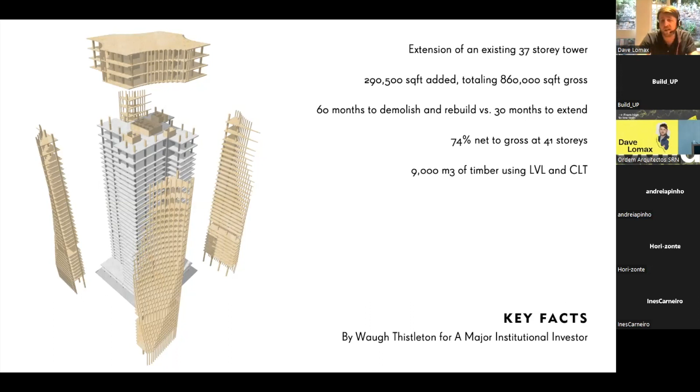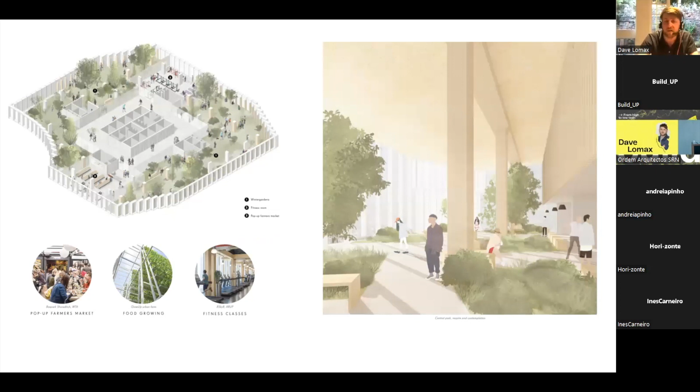So again, building on all those conversations we've had to start to think about things in different ways, start to think about how our systematized approach and offsite manufacturing knowledge can feed into reinvigorating existing buildings and laying over them the things that people expect in the post-COVID world, ideas of natural materials, of spaces that make you feel good, rather than spaces that are crammed full of synthetic materials, that are dark, that are inhumane. And timber can be part of all of those stories.

Finally, I am getting to the end, I promise. We've gone at great speed to try and save 10 minutes for questions.

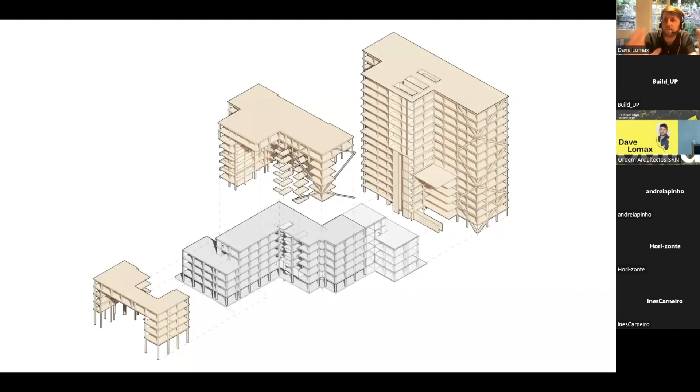But this is just a little example that we're working on in the Netherlands at the moment, which is taking that idea and doing it on a slightly smaller scale. This one we're much more hopeful of happening, but it's taking an existing low-level concrete building and reimagining that as new development, but keeping all that carbon in the concrete. So we're really interested in that too. Just because we like wood doesn't mean we want to obliterate concrete buildings. We want to save them. We want to keep the carbon in them for as long as we possibly can.